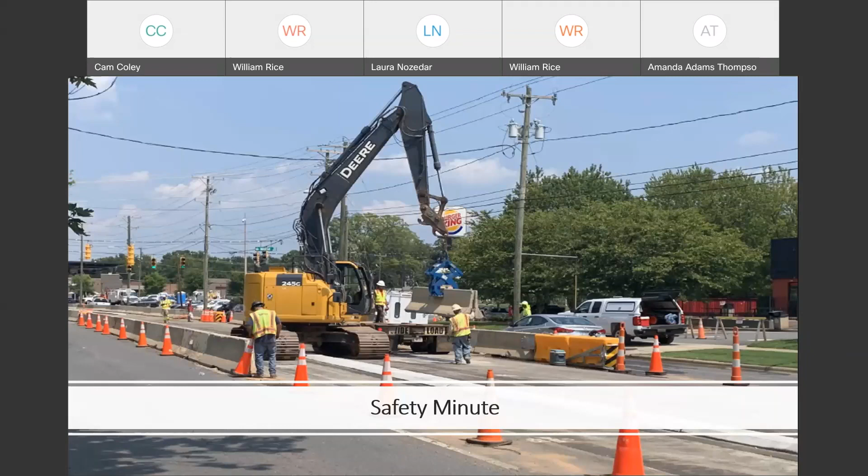What we're going to talk about today: I'm going to touch real quickly on why we're doing this project again, since it's been a long time since we laid out the justification for it. We'll talk about what work is going on now, a quick mention of the traffic detours, and then on to how it's made. If you've seen these virtual meetings in the past, you'll know I spend a lot of time talking about how we do what we do. I think it's pretty interesting. I'm going to touch on Dairy Branch, another overlapping project in the near vicinity with some intersecting pieces, to clarify who's doing what, where and when. And lastly, I'll put the contact slide back up again.

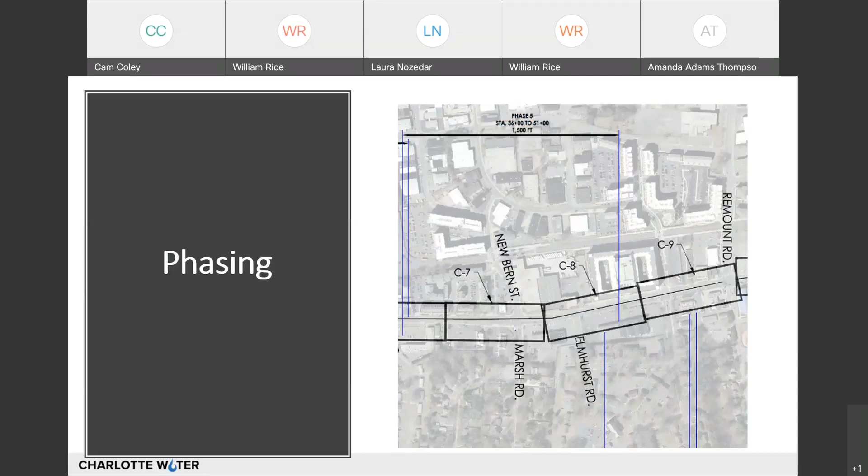Here's the map, sort of where we are now, and sort of the phasing. That phase 5 number is off. We're in phase 6, but it's pretty close to the same vicinity. We are just north of Elmhurst, and we stop short of Ideal Way and Remount.

But all that to say, the detour that you're going to need if you have to access Poindexter is going to be coming down Elmhurst and coming down Haverford, or of course you can come all the way down Elmhurst to Poindexter if you want, if you're going towards Park Road. That's going to be the biggest unfortunate detour necessary. Ideal Way and Remount are still fully open. And if you're coming on down South Boulevard, you need to turn right on Poindexter. That will be fully open until we make the connection on that side.

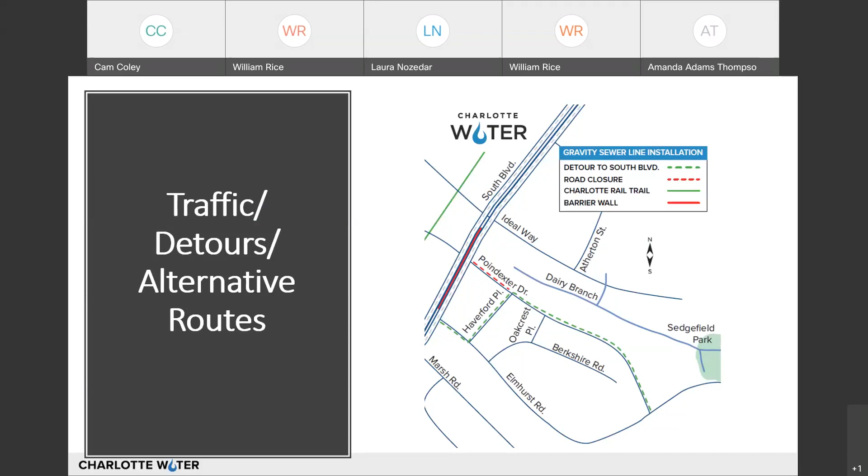Okay, now into my favorite part of these meetings, Construction 101, how we make these water lines and put them in the ground. I'm going to show some pictures of some asphalt milling results. We're going to, as always, talk about soft digs. It seems to be a recurring theme. A little bit about pipe assembly. I'm going to show some service connection stuff, and then curb and gutter and sort of finishing.

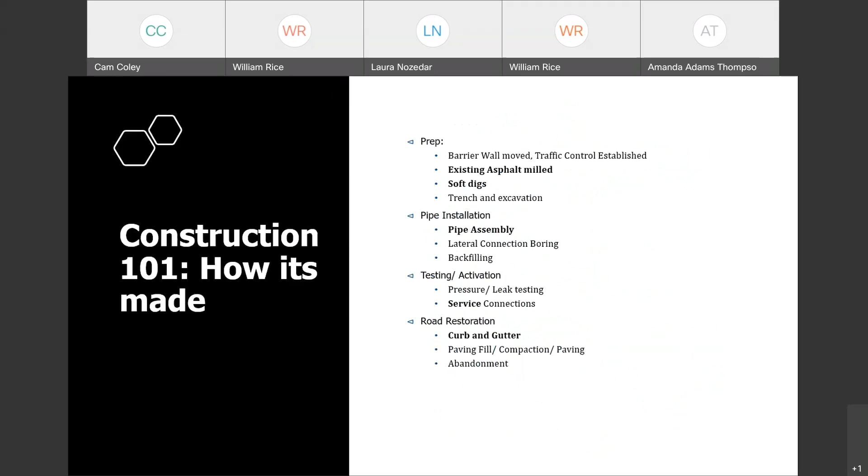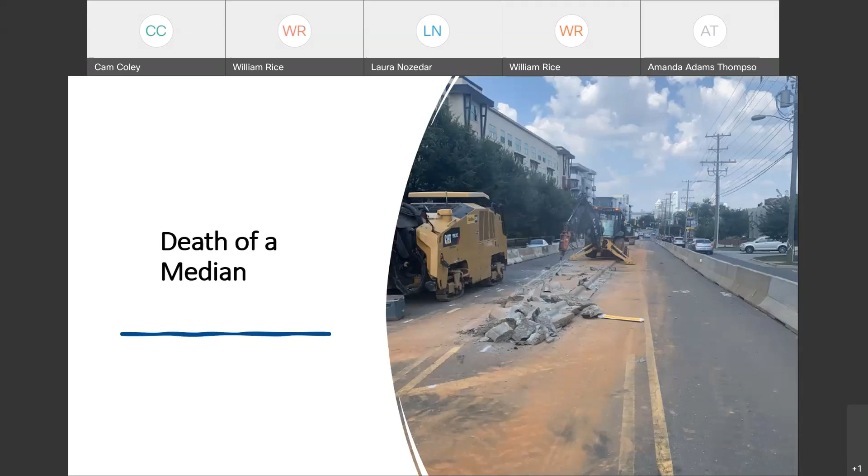And then once that median is gone, you can see this other piece of equipment out here on the left. It says CAT on the side of it. That's actually a milling machine. It's basically like a giant sander, but it sands asphalt and it's very large. It's going to come back afterwards and remove layers of asphalt. So this is what it looks like. You can still see the asphalt on either side of the trench, but basically it comes through and removes that.

Then, from here, we're going to go ahead and dig. Now we're down to dirt, dig the dirt out, put the pipe in. We only mill as much as we have to. We want to leave as much asphalt in place just to save money, and also, it's less to come back and repave at the end. So for the most part, you can see that's where the trench is going to be that the water line goes into.

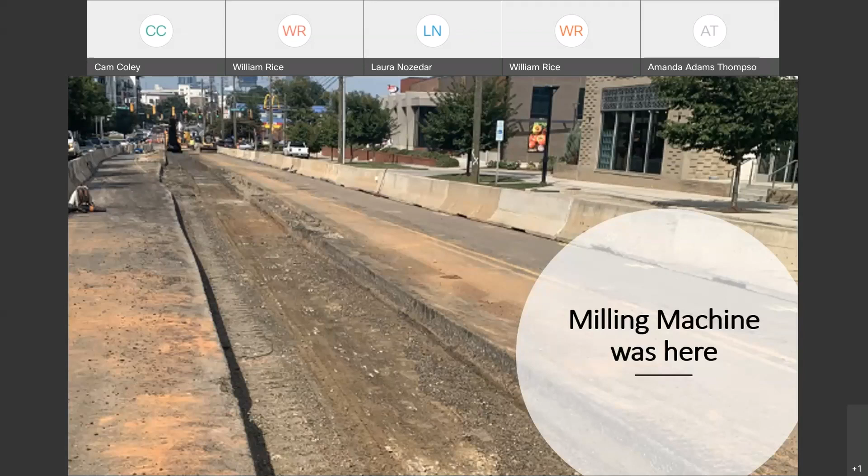Then once we've been done milling, before we actually go and start really digging deeply, we call 811, call before you dig, and then we go out and everywhere that 811 has located either a gas line or a fiber optic line or a telecommunication line or one of our water lines or one of our sewer lines, we go ahead and do a soft dig. So we trust 811 that they've marked utilities as they exist, but then we also go out and just to be extra cautious, extra layer of precaution, we go ahead and soft dig.

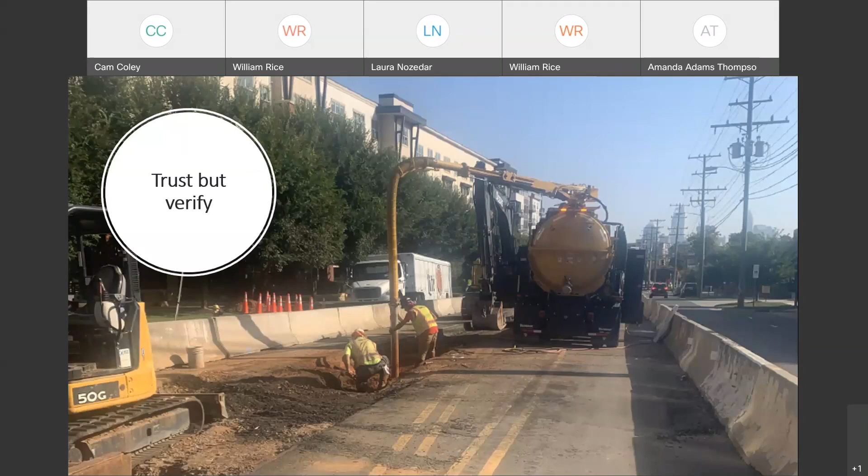It's not too different from what dentists do, actually. They got the pick in one hand to clean your teeth with, and then they have the vacuum in the other hand to remove anything that they've dislodged.

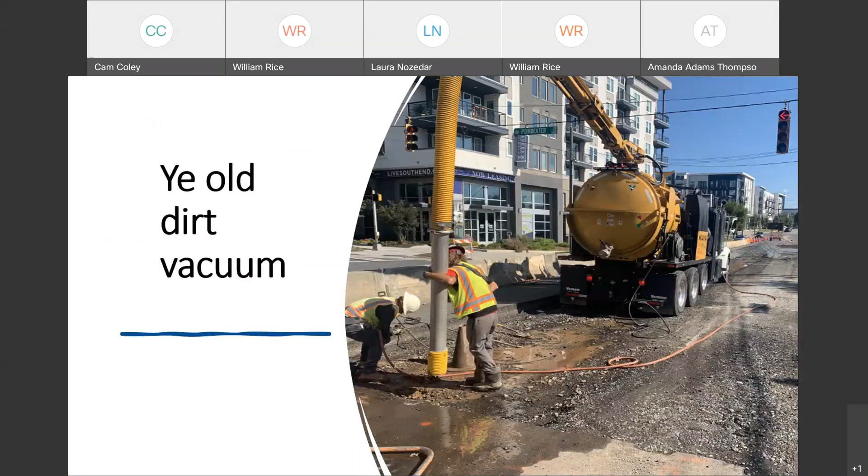We do a lot of soft digging. This is actually not in our work site. This is off to the right. I think they're looking for a service connection or something like that. But RH Price has just been doing a ton of soft digging because, yeah, it's very important that we know what's under the ground and where it is, and we've located it, and we just know absolutely sure that if we're going to go dig there, that we're not going to damage or break anything.

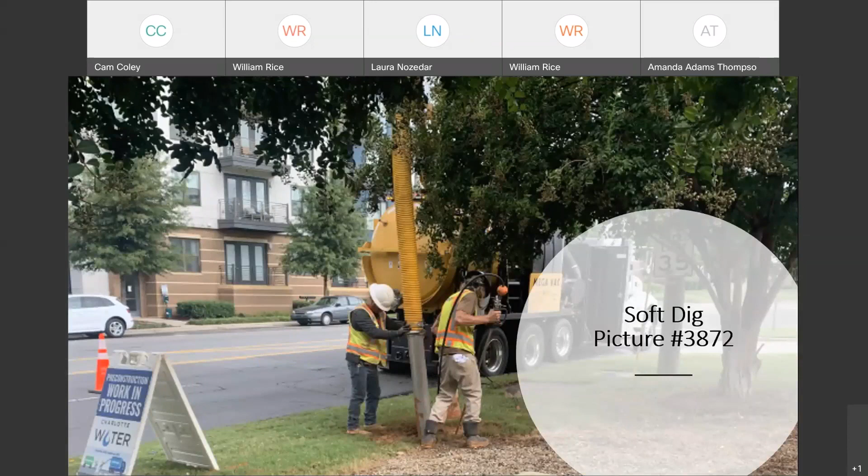One more picture of soft digs. You can see sort of the end result is there's a little square of asphalt missing, and then they've put the dirt back in the hole after they've located it, and then they paint on the sidewalk there too. You can see that's probably the depth to whatever they were looking for, 28 inches. So then when we're coming back through there, we know that there indeed was something that was marked, and we indeed soft dug it, and we found it, and it was there, and it's all been proven. So now we can know where not to dig to break anything.

And then of course I had this sign made to help educate people about what a soft dig was. And again, it's a picture of a guy with a vacuum hose and a picture of a guy with a compressor hose, slowly removing material so we can get down to a utility without damaging it.

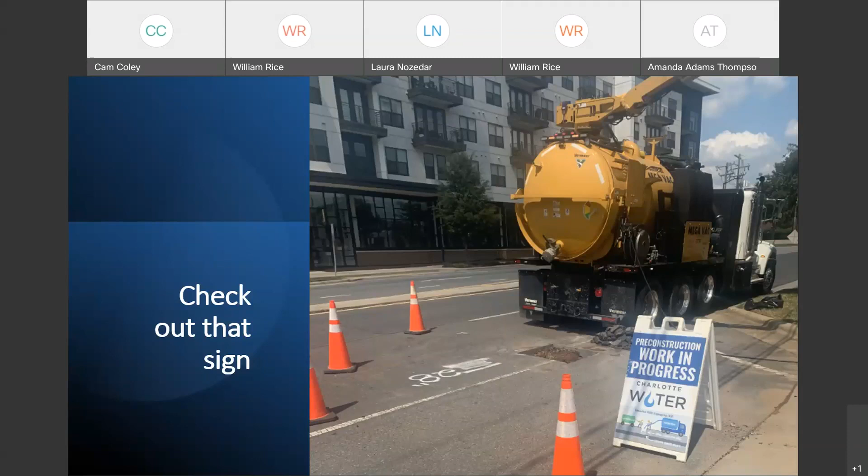Oftentimes, we sort of gloss over the work that's happening on the side streets because all the big equipment's right there in the middle of South Boulevard, all the bigger excavators. But yeah, then we have to go back and make these side street connections, and it's a pretty similar process. You cut the asphalt away and you excavate and you soft dig to make sure you know where stuff is. It's basically the same thing, but on a smaller scale.

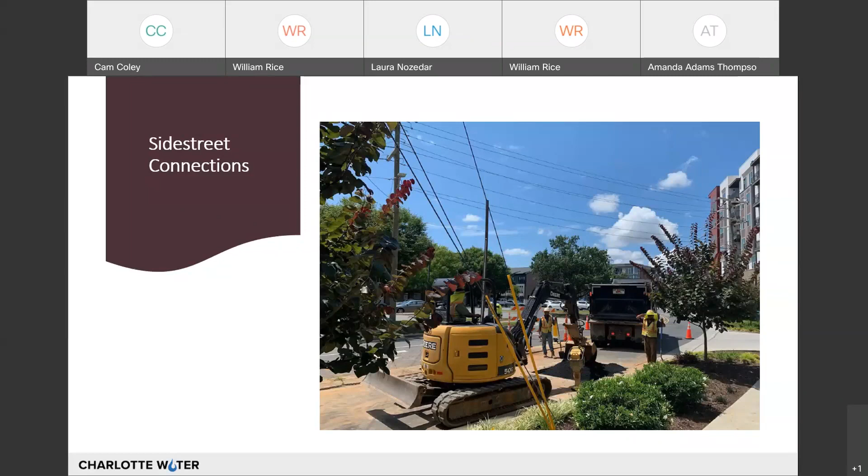And then once we have the water line in place and we're starting to do what we call our restoration, one of the big things is putting those medians back in place. South Boulevard had recently implemented some medians in the past 5 to 10 years to help with traffic and help with pedestrians. So of course, we're putting back anything that we tore up in the first place to put our water line in.

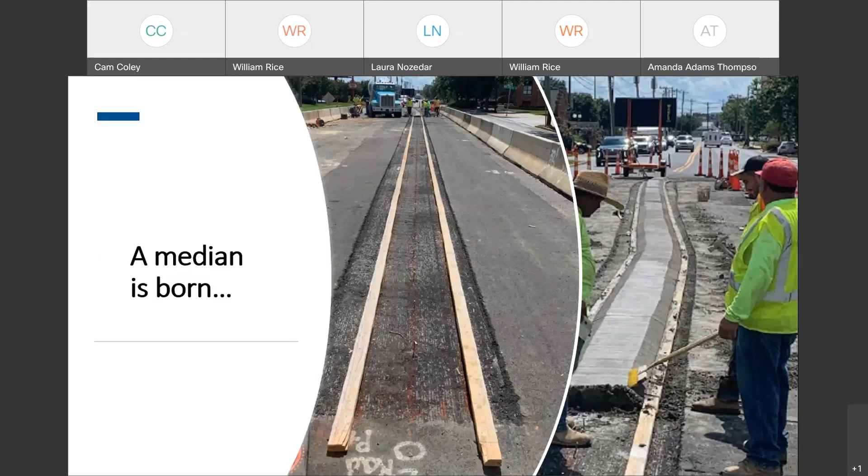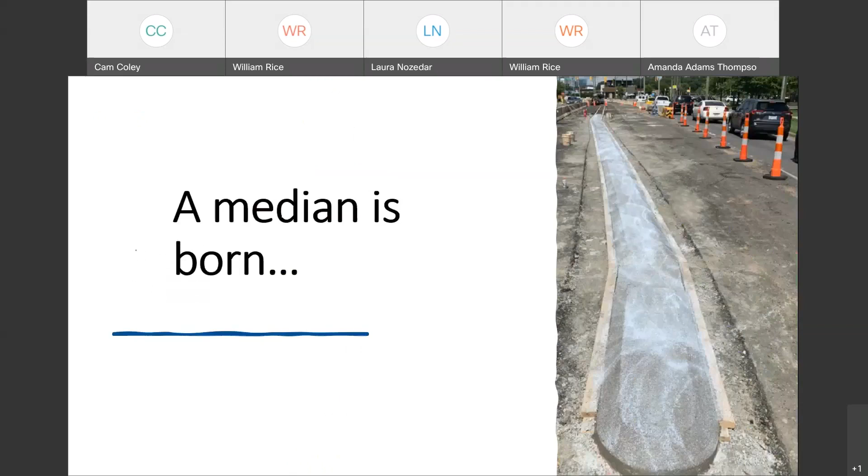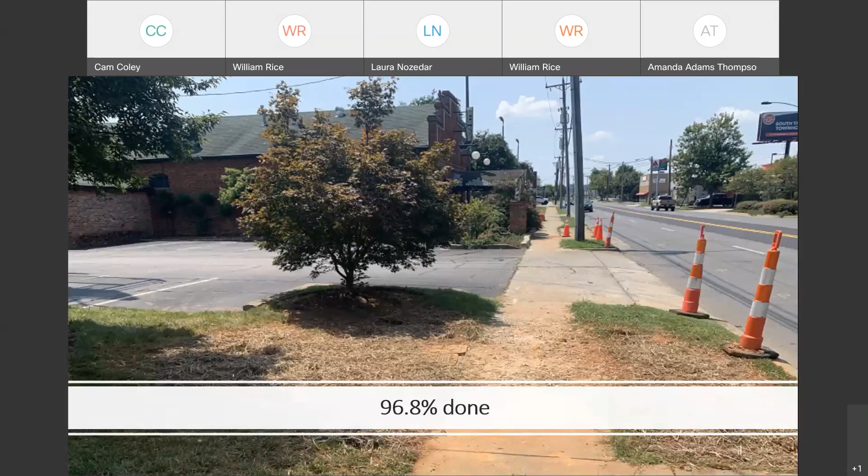And then we get to something like this, right, where we're so close to being done. This is just south of the Chick-fil-A. We're really, really close to being finished up here. The new water connection has been done. We put down some seed and straw here to help reestablish vegetation so that this ground won't wash away when it rains. But of course, we still do need to come back here and do a little bit of sidewalk repair. So even though it's so close to being done, there's still a little bit of work left to be done.

By the time we're done there, that sidewalk will be brand new, nice, and those cones will all be gone, of course. And that's how you know: when you see the brand new asphalt and pavement and brand new lines and brand new sidewalk and all the cones are gone, that's generally the sign that we really are fully completed with that portion of the project.

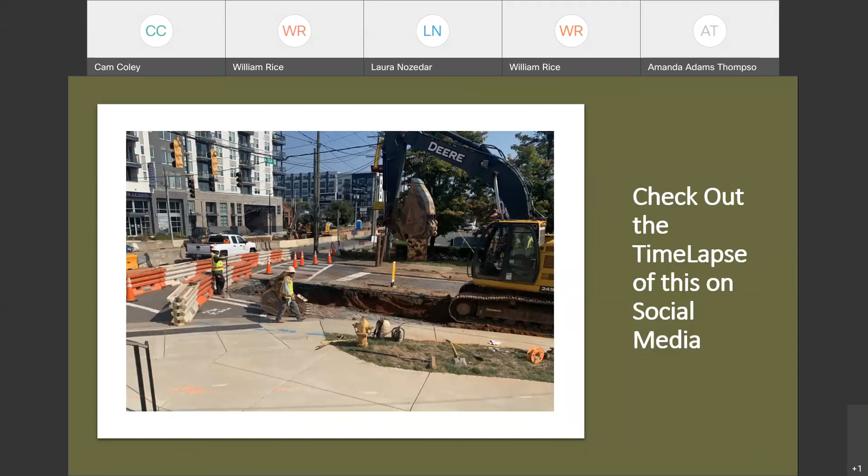And with that, are there any questions? I don't currently see any questions in the chat. I'm going to pause. You got a question? Now's your chance.